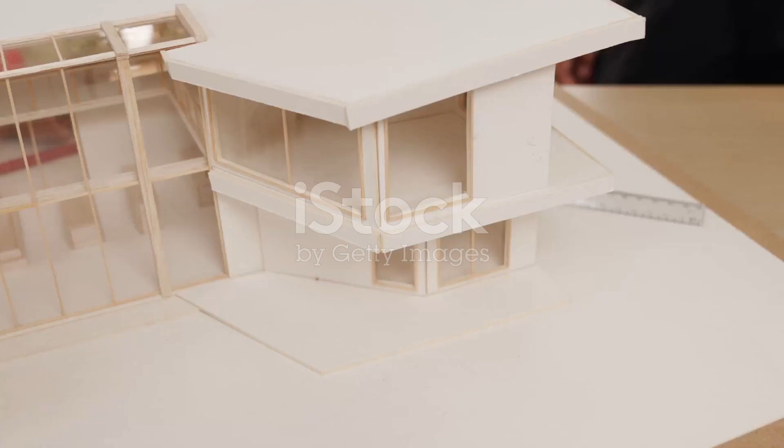Our planet is a marvel of diverse climates. From scorching deserts to icy tundras, each region presents unique challenges and opportunities for those who dare to build. Architecture, at its core, is a response to these environmental conditions. It is the art and science of creating spaces that protect us from the elements while harmonizing with the natural world.

For centuries, humans have instinctively understood this connection. We have crafted homes that provide shelter from the sun, wind, and rain. We have designed structures that maximize natural light and ventilation. This innate understanding of climate-responsive design is evident in traditional building practices across the globe.

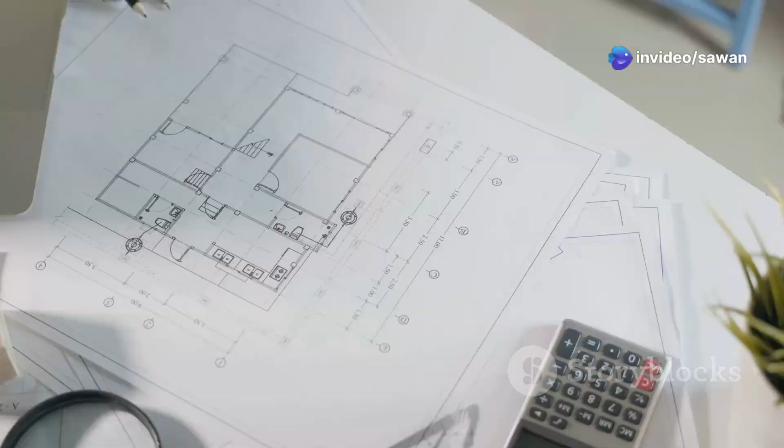Think of the thick adobe walls of desert homes designed to absorb heat during the day and release it slowly at night. Consider the steeply pitched roofs of houses in snowy regions built to shed snow and prevent collapse. These examples highlight the ingenuity of our ancestors who recognized the importance of working with, not against, the forces of nature.

Today, as we face the growing urgency of climate change, the need for climate-responsive architecture is more critical than ever. We must move beyond simply mitigating the negative impacts of our buildings and strive to create structures that actively contribute to a healthier and more sustainable future.

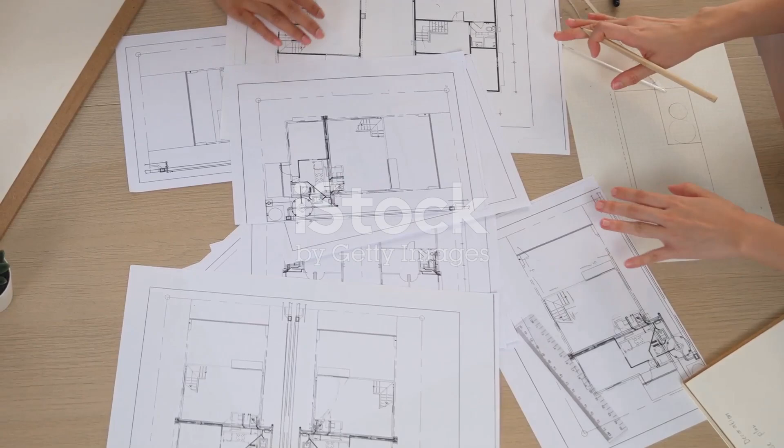The climate of a place is not just about the weather on a given day. It is a complex interplay of factors that profoundly influence the design, construction, and performance of buildings. Ignoring these factors can lead to uncomfortable, unhealthy, and unsustainable living spaces.

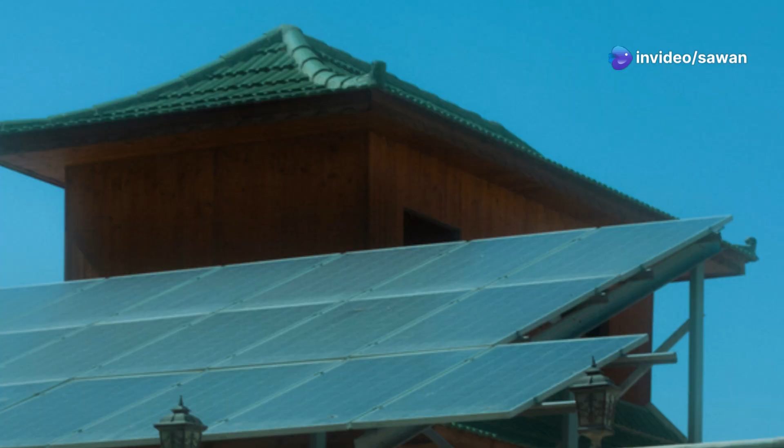Firstly, climate has a direct impact on thermal comfort. A well-designed building should provide a comfortable indoor temperature year-round, regardless of the weather outside. This means keeping the interiors cool in hot climates and warm in cold climates, without relying excessively on energy-consuming systems.

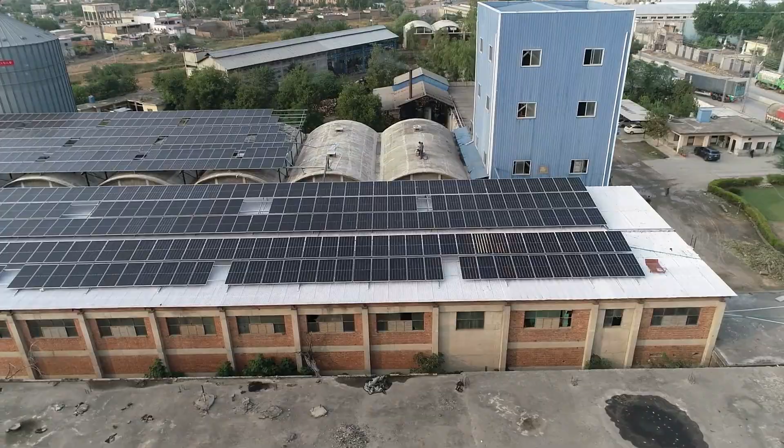Furthermore, climate heavily influences a building's energy efficiency. Buildings are responsible for a significant portion of global energy consumption, much of which is used for heating, cooling, and lighting. By designing structures that maximize natural light, passive heating, and natural ventilation, we can drastically reduce energy consumption and minimize our carbon footprint.

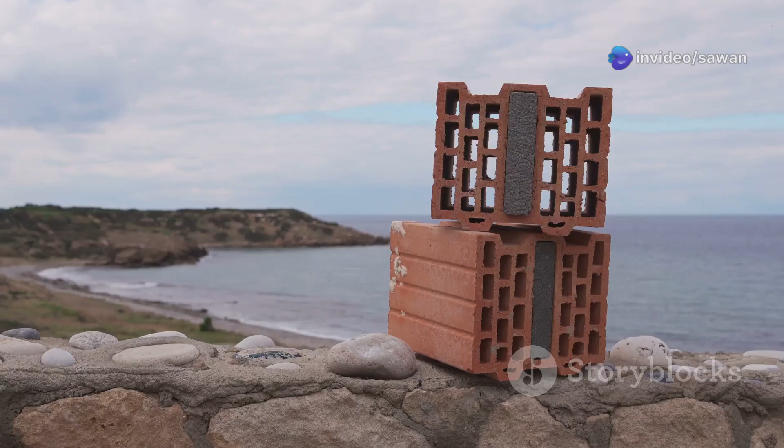Beyond energy, climate also affects the durability of building materials. The choice of materials should consider local weather patterns. For instance, using corrosion-resistant materials in humid coastal areas or opting for materials with high thermal insulation in regions with extreme temperatures can significantly extend the lifespan of a building.

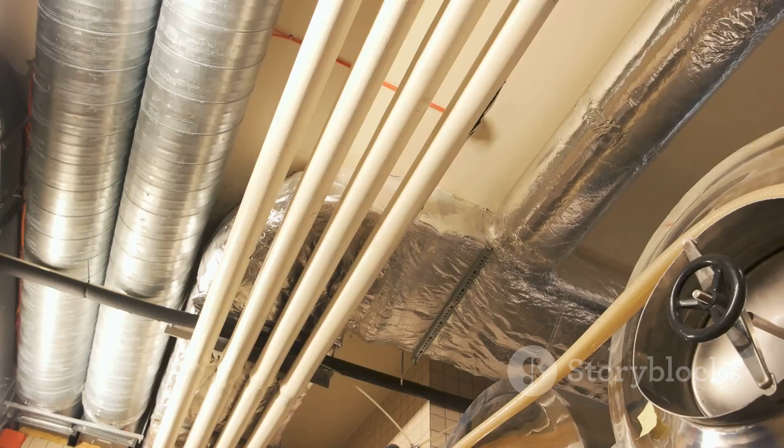Moreover, the health and well-being of occupants are directly linked to the quality of the indoor environment, which in turn is influenced by climate. Proper ventilation, humidity control, and protection from extreme temperatures are crucial for maintaining good indoor air quality and preventing respiratory problems and other health issues.

Lastly, climate-responsive architecture is fundamental to environmental responsibility. By reducing energy consumption, minimizing waste, and promoting the use of sustainable materials, we can lessen the environmental impact of our built environment and contribute to a more sustainable future.

The Earth's surface is a tapestry woven with diverse geographical features. Each element, from latitude and altitude to topography and vegetation, plays a crucial role in shaping the local climate and consequently influencing architectural design. Latitude, the distance from the equator, dictates the intensity and duration of sunlight a location receives.

Buildings located closer to the equator require designs that prioritize shading and ventilation to combat the intense heat. In contrast, structures in higher latitudes benefit from designs that maximize solar gain to compensate for the weaker sunlight.

Altitude also plays a significant role. As we ascend to higher altitudes, the air becomes thinner, leading to lower atmospheric pressure and temperature. Buildings in mountainous regions often feature steeper roofs to facilitate snow shedding and thicker walls for insulation against the cold.

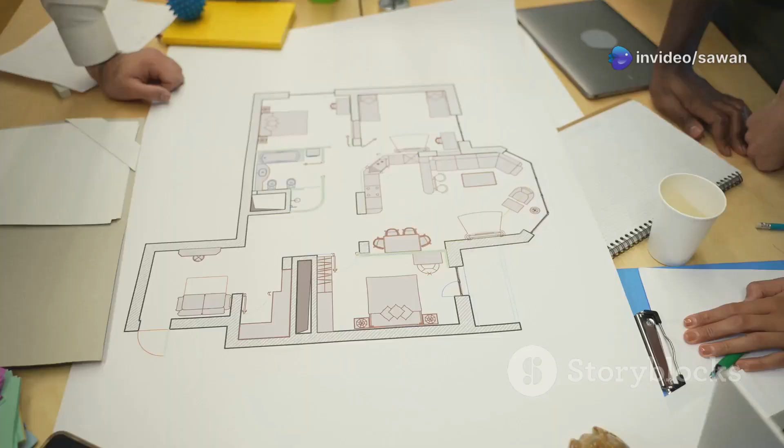Topography, the arrangement of natural and artificial physical features of an area, further influences local microclimates. Hills and valleys can create wind tunnels or pockets of stagnant air, impacting ventilation and temperature. Architects must carefully analyze these patterns to optimize building orientation and design.

The presence or absence of vegetation also plays a vital role. Trees and plants act as natural air filters, provide shade, and help regulate temperature through evapotranspiration. Integrating vegetation into and around buildings can significantly improve their microclimate and reduce the urban heat island effect.

Finally, the built environment itself influences the local climate. The density of buildings, the materials used in construction, and the presence of paved surfaces can all impact wind patterns, temperature, and air quality. Understanding these interactions is crucial for designing buildings that integrate harmoniously with their surroundings.

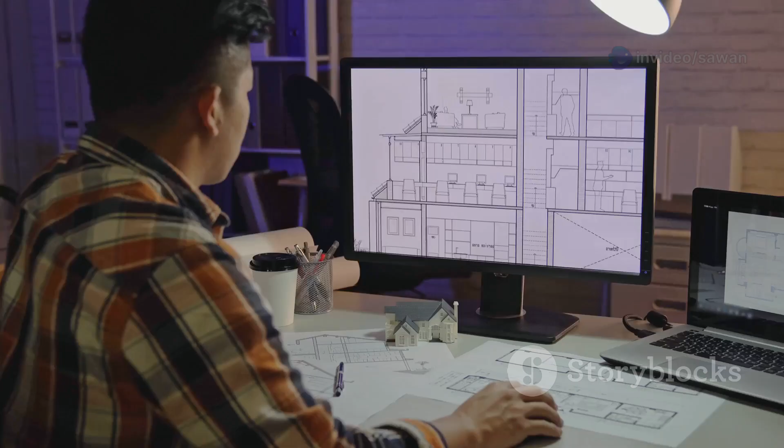Section 4. The Sun's Embrace: Solar Radiation and Design. The Sun, our nearest star, bathes the Earth in life-giving light and warmth. Understanding the dynamics of solar radiation is fundamental to designing buildings that harness this energy efficiently while mitigating its potential downsides. The amount of solar radiation received at a particular location depends on factors like latitude, time of year, and

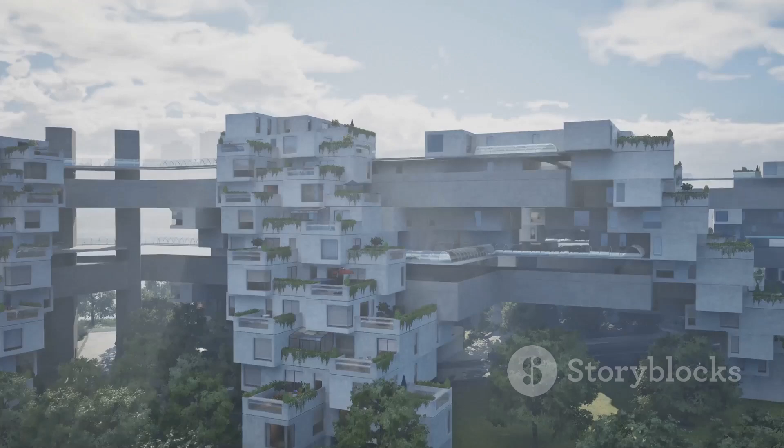time of day. Buildings located in lower latitudes receive more direct sunlight throughout the year, while those in higher latitudes experience significant variations in sunlight intensity and duration with the changing seasons. Architects can optimize building design to maximize or minimize solar heat gain depending on the climate. In cooler climates, incorporating large south-facing windows can capture sunlight for passive heating during the winter months.

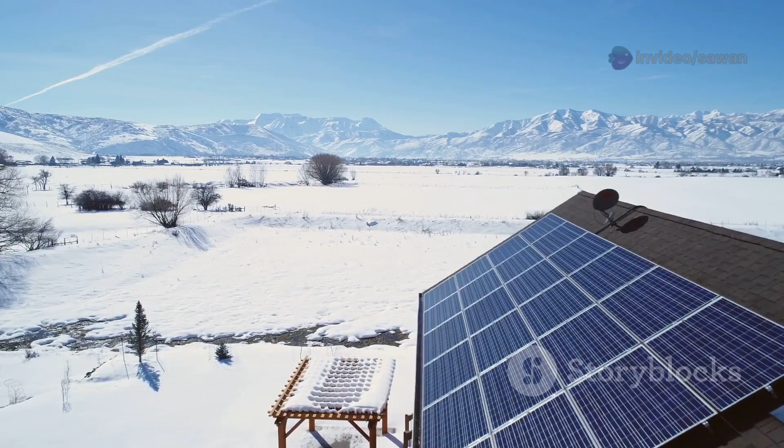Conversely, in hotter regions, strategically placed overhangs, awnings, and shading devices can block direct sunlight, reducing the need for air conditioning. The orientation of a building also plays a crucial role in managing solar gain. Aligning the building's long axis along the east-west direction allows for maximum exposure to the sun during the cooler morning and evening hours, while minimizing heat gain during the hottest part of the day.

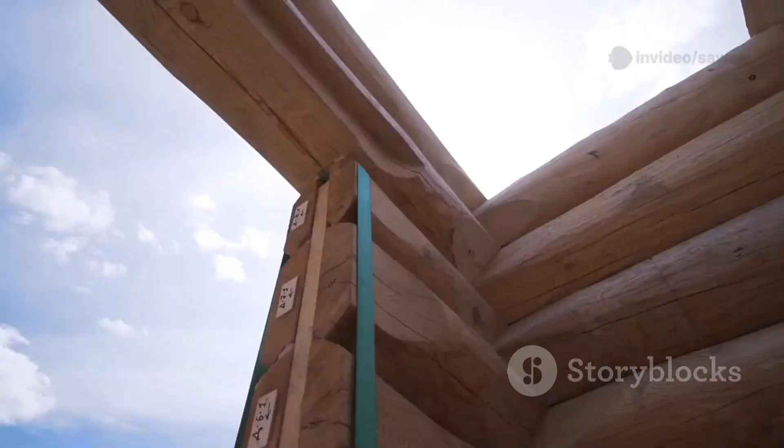Furthermore, the choice of building materials can influence solar heat absorption and reflection. Light-colored surfaces reflect more sunlight, keeping the building cooler, while darker surfaces absorb more heat, which can be beneficial in colder climates. Understanding the intricacies of solar radiation allows architects to design buildings that are not only energy efficient, but also provide comfortable and healthy living spaces.

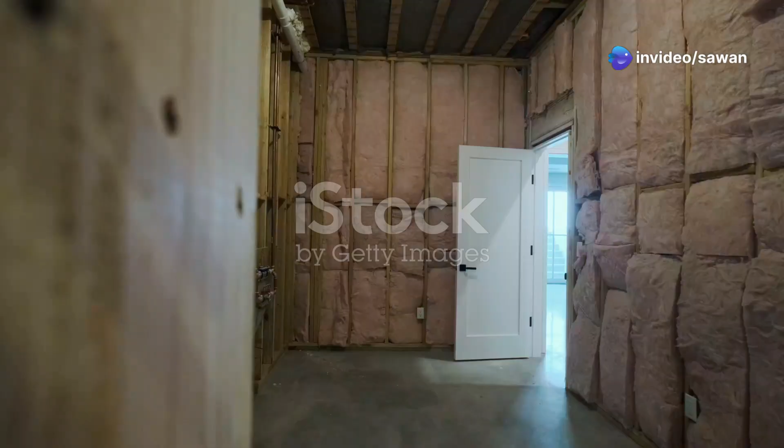Section 5. Temperature's Dance: Adapting to Heat and Cold. Temperature, a fundamental element of climate, plays a critical role in determining human comfort and influencing architectural design choices. Buildings should act as mediators between the external environment and the interior spaces, providing a comfortable temperature range throughout the year. In hot climates, the primary concern is mitigating heat gain and ensuring adequate ventilation.

Traditional architectural styles in such regions often feature high ceilings, courtyards, and verandas to promote natural ventilation and create shaded outdoor spaces. Thick walls constructed from materials with high thermal mass, such as adobe or stone, can absorb heat during the day and release it slowly at night, moderating temperature fluctuations. Light-colored exterior finishes reflect sunlight, further reducing heat gain.

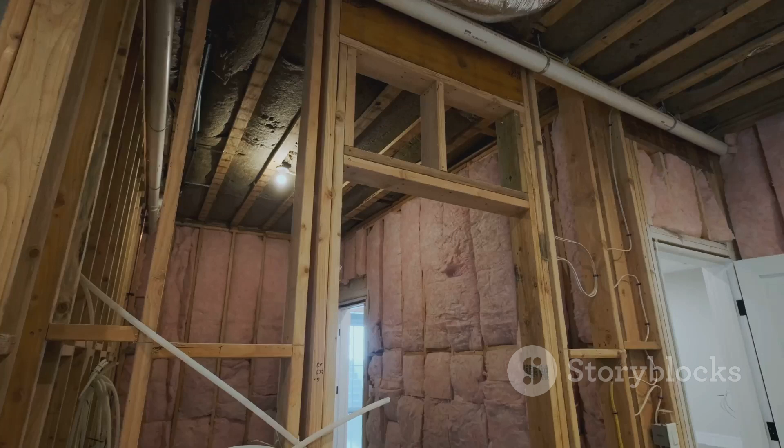Conversely, buildings in cold climates prioritize heat retention and minimizing heat loss. Compact designs with minimal surface area reduce exposure to the elements, while well-insulated walls and roofs prevent heat from escaping. Windows, while essential for natural light, can be significant sources of heat loss. Double or triple-paned windows with insulating gas fillings can significantly reduce heat transfer.

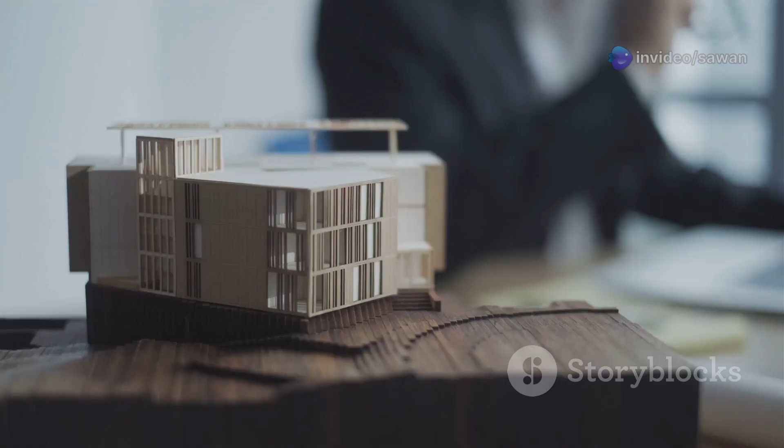Additionally, strategically placing windows to maximize solar gain during the winter months can contribute to passive heating. Understanding the nuances of temperature variations allows architects to employ passive design strategies that create comfortable and energy-efficient buildings, regardless of the climate.